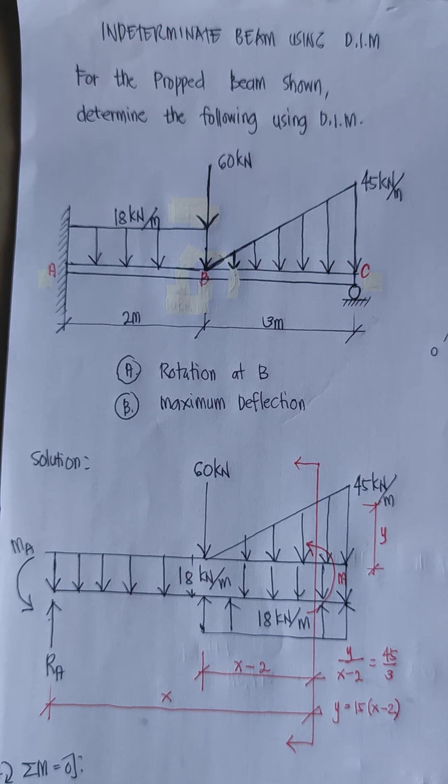Okay, so for this problem, pag-uusapan naman natin ang indeterminate beam using the double integration method. So dito, sa problem na to, meron tayong example problem. For the propped beam shown, determine the following using the double integration method.

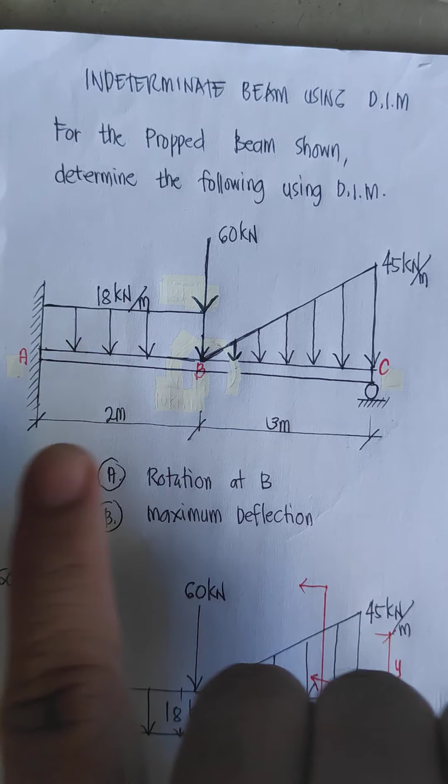So given tayo ng propped beam. So pagka sinabi nating propped beam, that is a fixed support and a roller support. So rotation at B, then the maximum deflection ang tinatanong. Okay? So to solve for that, here is the solution.

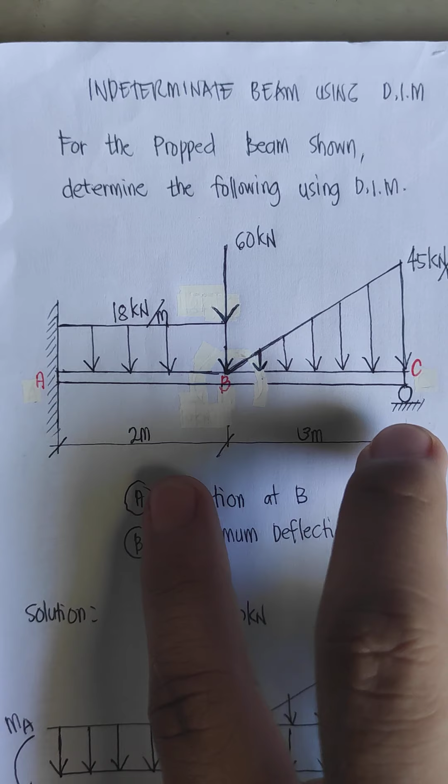So we apply the formula R is equal to 3N. Kung equal siya, so that is statically determinate. Then pag that is greater than, yun ay statically indeterminate.

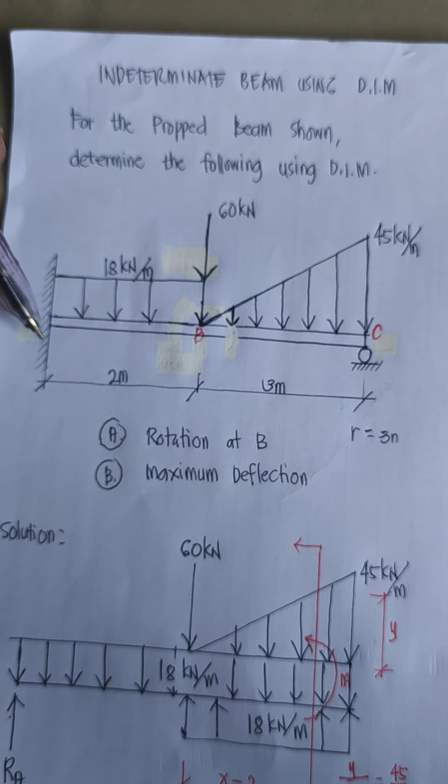So, ilan ang reaction? Tatlo to kasi meron tayong horizontal, vertical, and moment. Then, we have one reaction for the roller. So, that is 4 is greater than 3 times 1, greater than siya kasi isang member lang naman, di ba? What is 3 times 1? So, that is 3. So, that is statically indeterminate to the first degree.

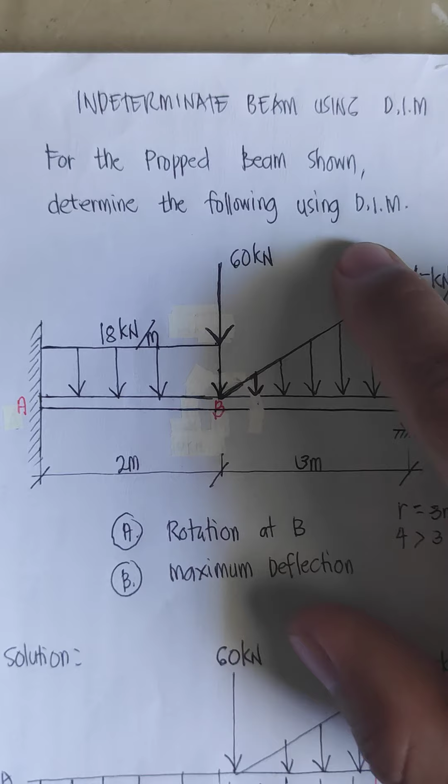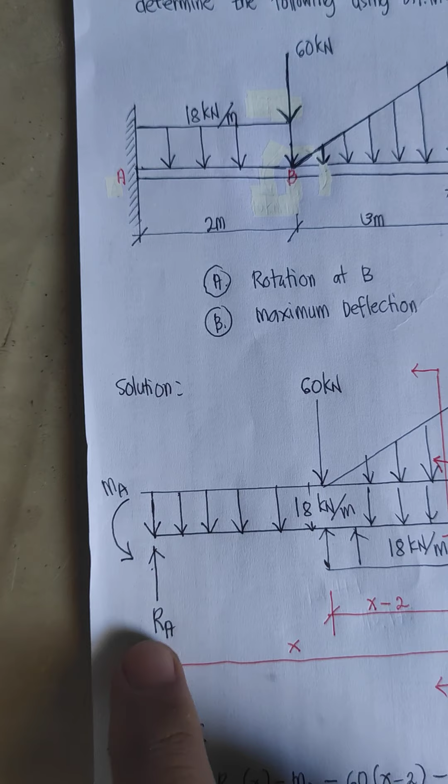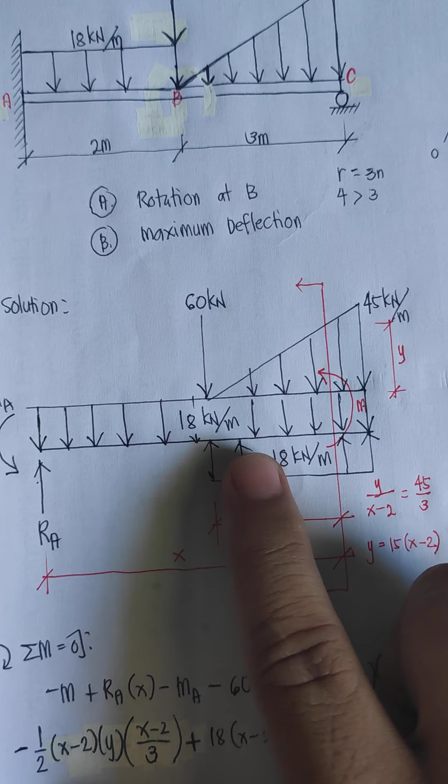So, ito yung 18 kN per meter. So, nag-assume na ako ng reaction na upward. So, that is RA and MA or the moment at point A is counterclockwise. So, itong 18 kN per meter ay i-extend natin hanggang makarating sa point C. Yun na yun. Then, syempre kung nagdagdag tayo ng 18 kN per meter na downward, so dapat magdagdag rin tayo ng 18 kN per meter na upward para ang mangyari parang wala ka lang dinagdag sa load na yun.

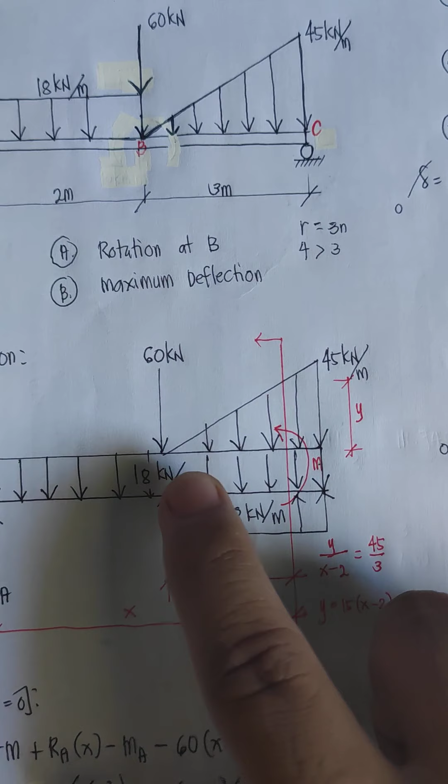Then, iakyat mo na lang ngayon yung triangular load natin or yung varying load natin na 0 to 45 kN per meter na intensity, di ba? So, that is the intensity of the varying load. Okay? So, yan na yung mangyayari dyan sa loads natin.

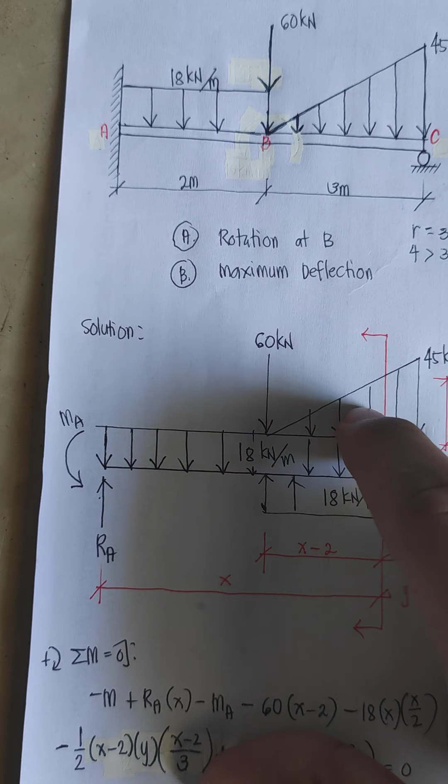Then, apply tayo ng cutting plane. So, magka-cut tayo dito sa point na to. Then, re-resist na moment is pa-left, I mean, counterclockwise. Okay? So, this distance is distance x. And this distance is x minus 2. Bakit naging x minus 2 to? Kasi this is x and this is 2 meters. So, this becomes x minus 2.

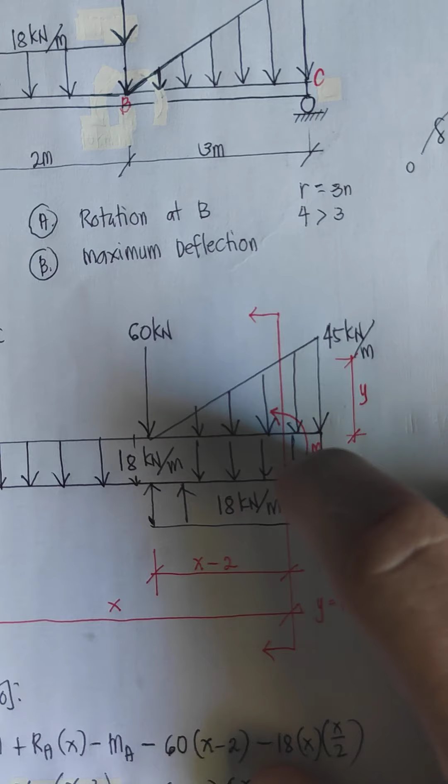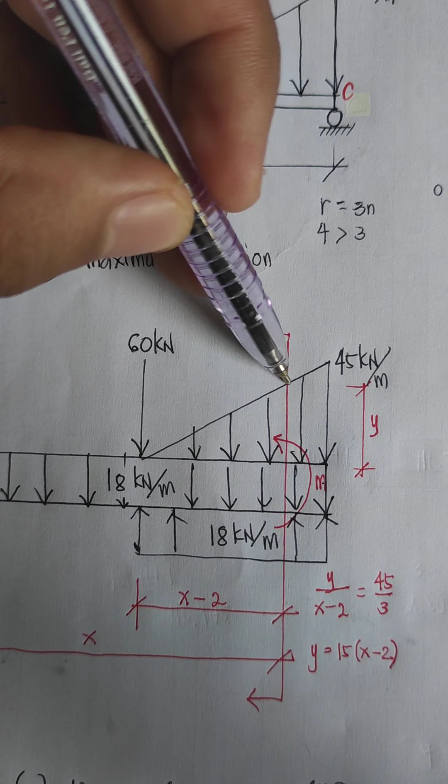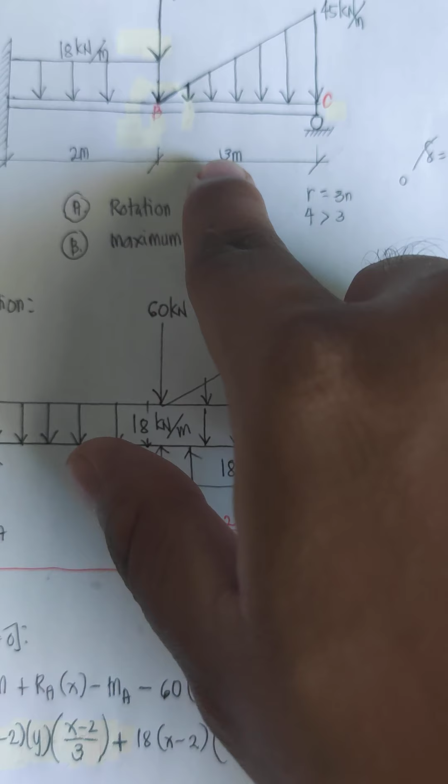So, let's say this is the intensity for the triangular load. Dito tayo nag-cut. So, mula dito sa point na to hanggang dito sa point na to, that is distance y. So, if that is y, we can apply the ratio and proportion. That is y over x minus 2 is equal to 45 over 3. So, that y is just equal to, what is 45 over 3? That is 15 times x minus 2. So, this is now the value for that intensity y na nagva-vary depende sa x natin.

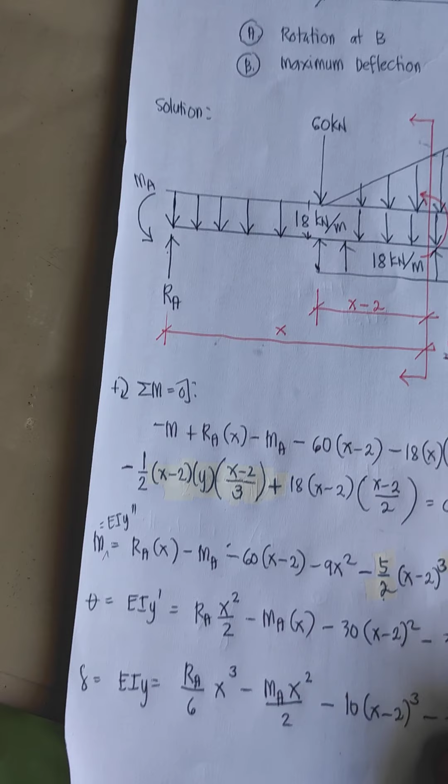Okay? So, applying the summation of moment is equal to 0. So, we have here the negative moment plus RA. Ito yung plus RA kasi clockwise. Nag-assume ako ng positive clockwise na naman. RA times x tapos minus MA. Ito yung MA natin which is counterclockwise kaya negative.

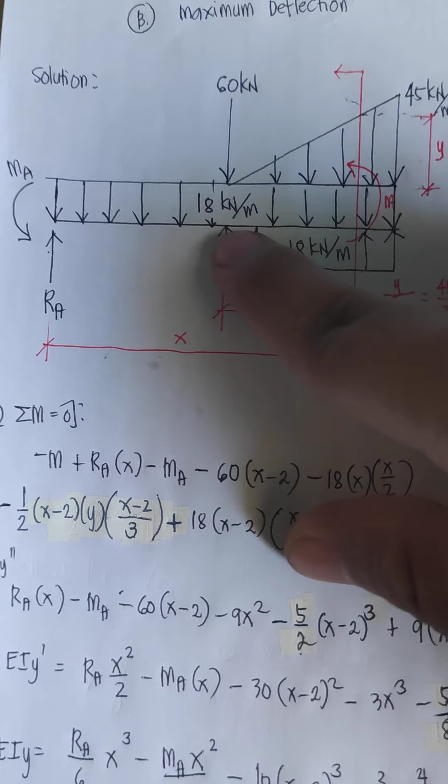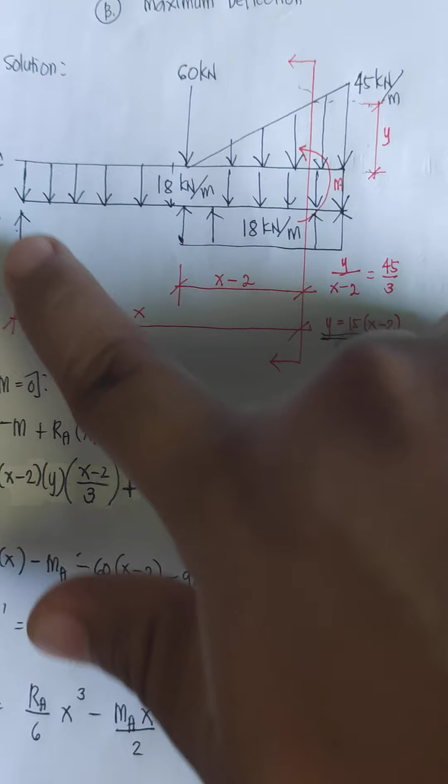Tapos itong 60, iikot na naman siya ng counterclockwise. Minus 60 times yung distance niya na x minus 2 minus 18. Ito yung 18 natin times x, distance x, diba? Then centroid na x over 2, yung location ng centroid, diba? Then minus 1 half. Itong 1 half na to, yan yung area ng triangular load natin.

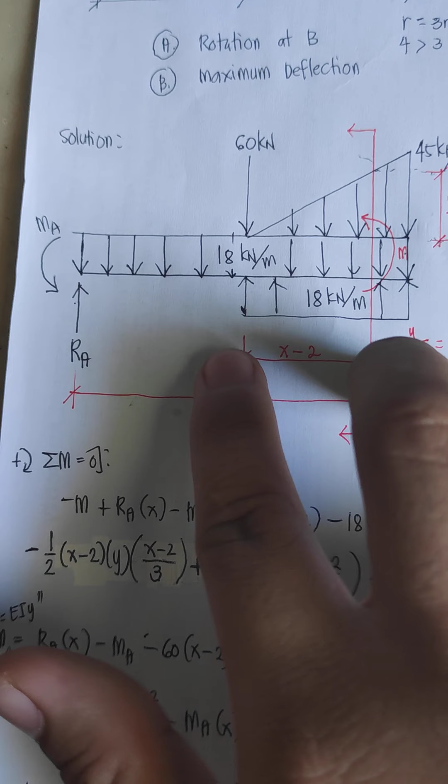So, ang area ng triangular load natin, 1 half ng base. Ang base natin ay x minus 2. Kaya x minus 2 yan. Tapos, yung height niyan ay y. So, ito yung y. Tapos, multiply lang natin siya sa centroid ng triangular load.

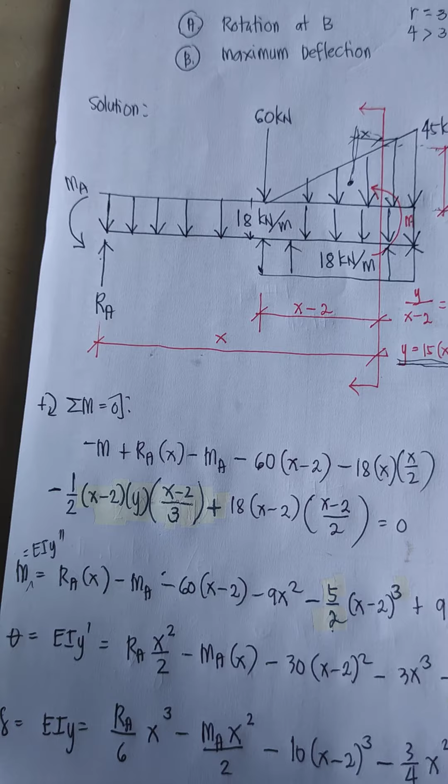So, centroid niya ay x over 3, diba? Yung base niya over 3. Oh, ito, ito yung x bar niya. So, ilan yung x bar na yan? That is x minus 2. Ito yung distance na to over 3, diba? Then, plus, we have here 18.

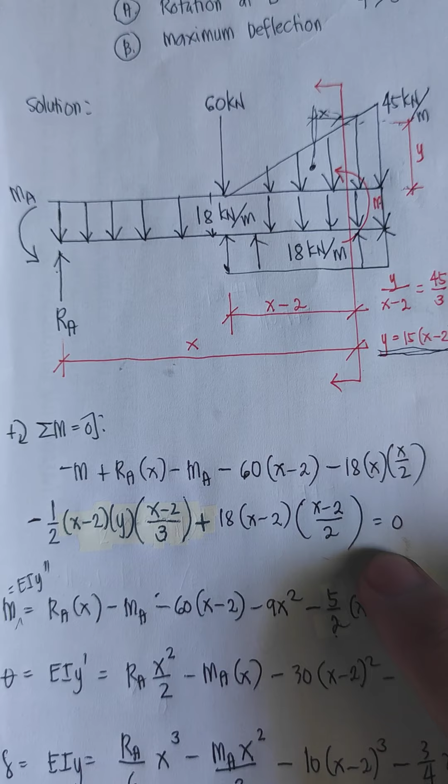Ito naman yung 18 na to na uniform load. Yan na lang yung hindi natin nakakount. So, that is 18 times x minus 2, times x minus 2 over 2, is equal to 0. Okay, so ganyan na. Ang kino-consider lang natin na load ay ito, hanggang dyan lang, kasi dun sa cutting plane. Okay? So, yan na yun. Then, is equal to 0.

Then, manipulate na uli natin yung equation. So, transpose natin yung m doon. So, that becomes, yung negative na yun magiging positive na. Is equal to EIy double prime by the definition of the double integration method. Then, simplify nyo na lang. Okay? 18 over 2 becomes 9.

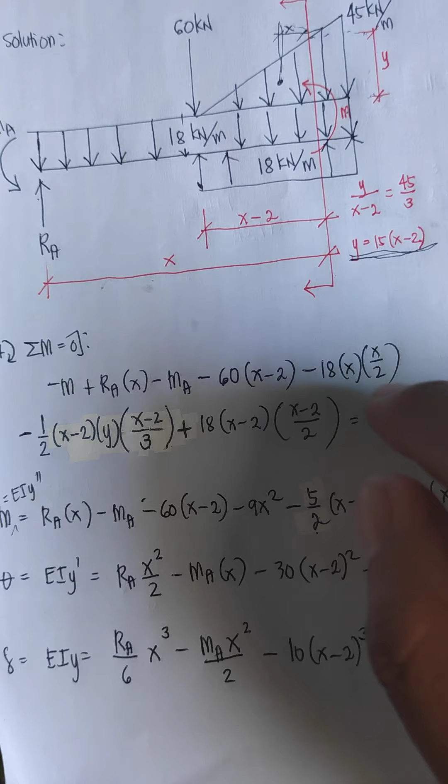Minus, paano to? Yung negative 1 half times x minus 2. Saan ba equal yung y na yan? That y is equal to 15 times x minus 2. So, kung papalitan nyo to, papalitan nyo natin yan ng 15 times x minus 2. So, ano mangyayari dyan? So, that is 15 over 2 over 3. So, pwede nating simplify yung 15 at 3, diba? Magiging ano yan? 5, diba? 15 divided by 3 is 5.

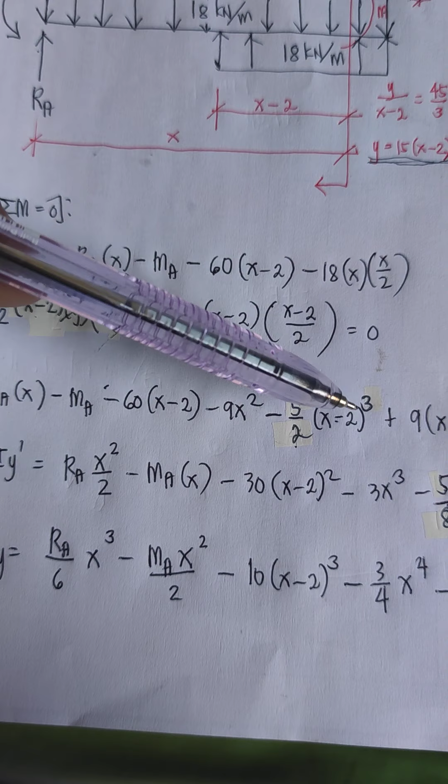Over 2, kaya naging minus 5 over 2 na lang yon. Tapos, times x minus 2 times x minus 2 times x minus 2. So, ang magiging sagot dyan, ang magiging multiplier nila ay x minus 2 raised to the third power. Okay, plus, ito naman, we have 18 over 2 magiging 9 times x minus 2 squared. Okay? So, yan na. Yan na yung magiging simplified equation yan.

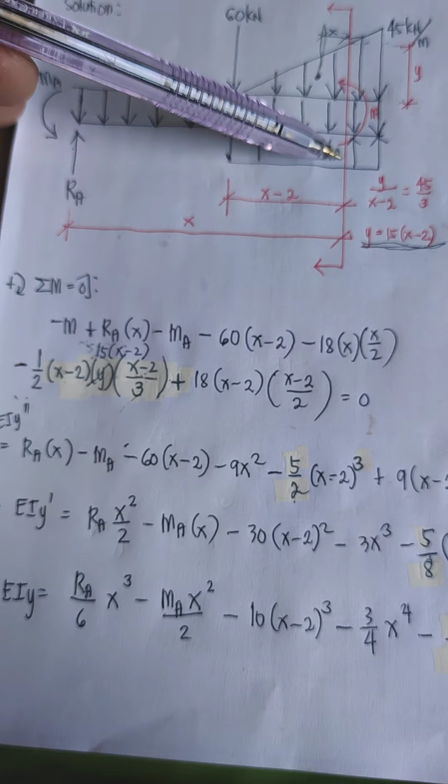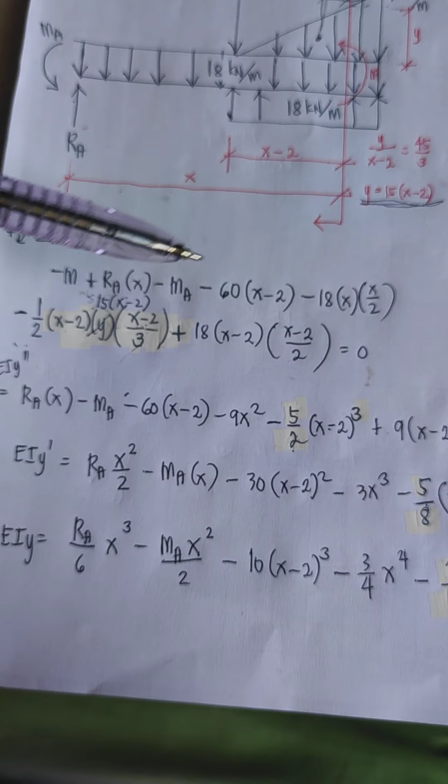So, idagdag ko lang pala para malaman nyo kung wala kayong nakaligtaan. Bilangin nyo lahat ng load. So, 1, 2, 3, 4, 5, 6, 7. So, 7 ba yan lahat? 1, 2, 3, 4, 5, 6, 7. So, 7 rin. Kaya, ibig sabihin lahat ng loads natin ay naisama natin sa pag-create ng moment equation. So, common mistake kasi yan na merong hindi nasasama na equation. So, yan na yun. Then, integrate natin for the first time.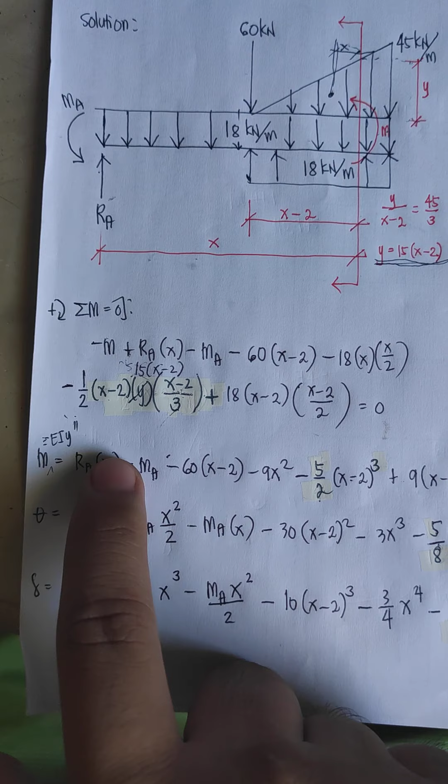Yun na yung magiging rotation equation. So, that becomes RAX, integral niyan. So, x squared over 2 minus MA times x. Since constant yan, so, ang integral niyan ay magkakaroon lang yan ng multiplier na x. Then, integral nito, x minus 2 raised to 1 yan. So, raised to 2 over 2. What is 60 over 2? Pwede na natin isimplify yun as 30 na lang.

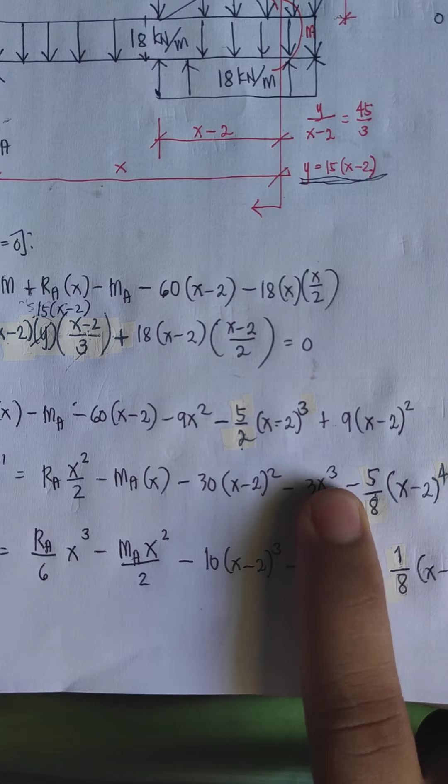Diba? Yung constant. Minus, what is the integral of 9x squared? So, that is 9x raised to 3 over 3. So, what is 9 over 3? That is 3x cubed, diba? So, madali lang naman i-check yan. Pag dinerivative mo yan, magiging yun lang rin yan, diba? Derivative nito ay 9x squared, diba?

Minus. So, integral nitong 5 halves ng x minus 2 raised to 3 is, ito magiging raised to 4 over 4. And then, what is 2 times 4? That is 8, diba? So, integral nyo rin to, raised to 3 over 3. What is 9 over 3? That is 3 times x minus 2 raised to 3 plus C1. So, that is now the rotation equation.

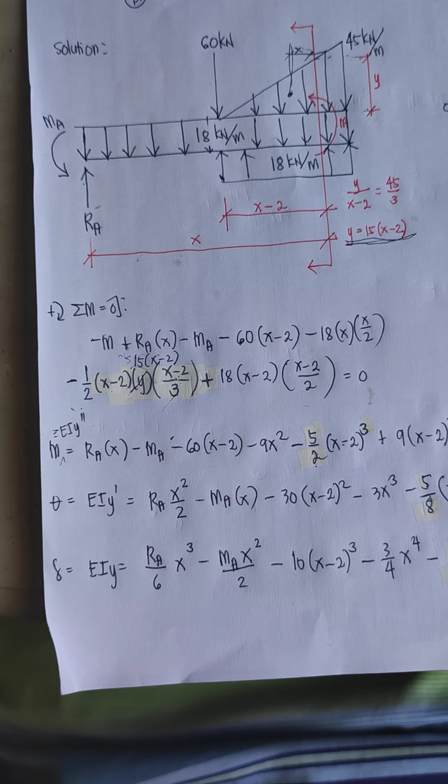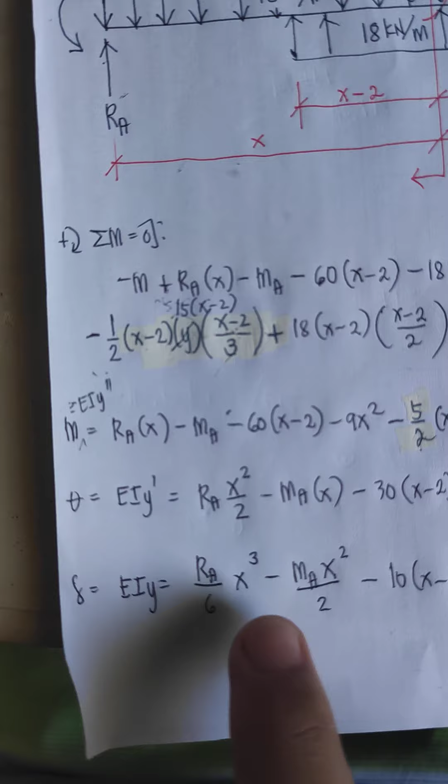Okay? So, for the deflection equation, so, integrate nyo for the second time. So, RA over 2, constant lang yan. X squared, integral nyan ay x raised to 3 over 3. Then, what is 3 times 2? So, that is 6. So, integral uli nito, MAX squared over 2.

Minus 30, tapos raised to 2, raised to 2 plus 1 over 2 plus 1, so raised to 3 over 3. Then what is 30 over 3? So magiging 10. Integrate nyo ulit ito, raised to 3 over 4, raised to 3. So magiging raised to 4 over 4. Ito na yan. Raised to 5 over 5. So, paano naging 1/8 yun? Kasi, simplify nyo lang, diba? So, meron ka dyang, meron tayo dyang 5/8.

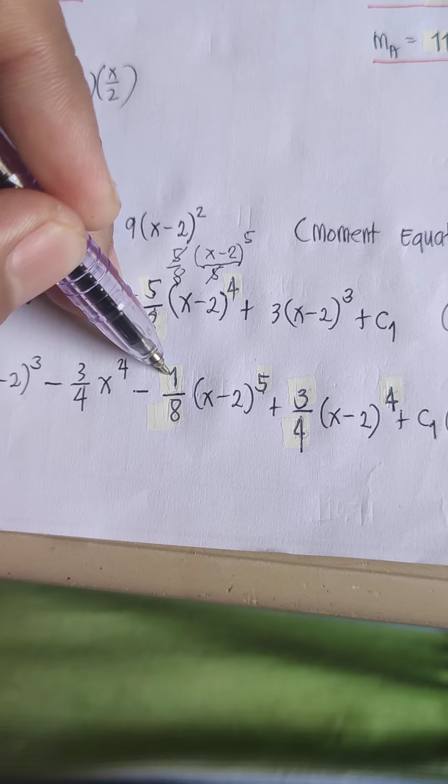Meron tayong x minus 2 raised to 4 plus 1, magiging 5 over 5, magka-cancel lang yung 5 dyan. Pwede nyo i-calculate para mas simplified, that is equivalent to 1 over 8 na lang, times x minus 2 raised to 5. Integral nito, raised to 4 over 4, tapos plus integral ng constant ay constant x plus the second arbitrary constant. So that is now the deflection equation.

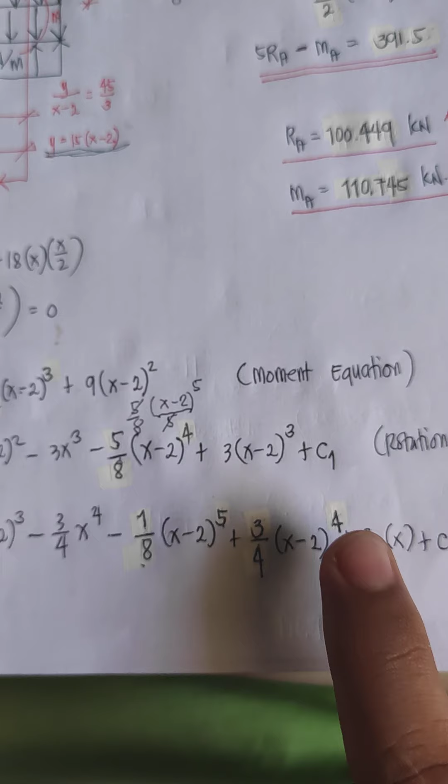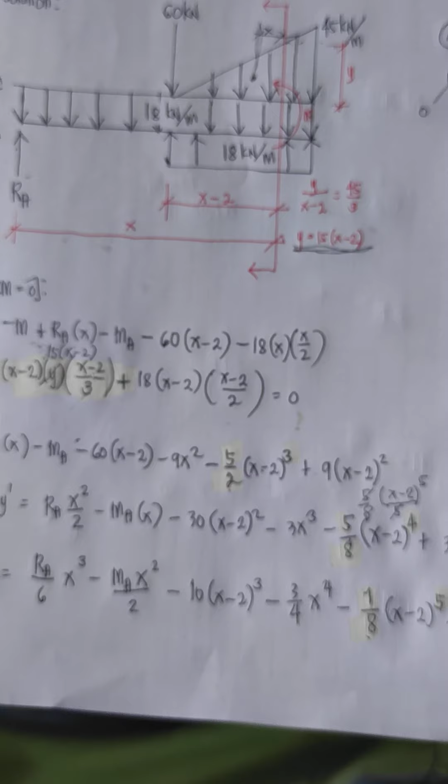Sa problem na to, ilan ang unknown natin? Hindi katulad pagka determinate beam, dalawa lang ang unknown natin, C1 and C2 lang. Pero dito sa problem na to, ang unknown natin ay 4 - meron na tayong dalawa dyan, tapos pangatlo, pang-4, yung RA at saka MA. So to solve for that, kailangan natin ang mga boundary conditions. Kailangan makakreate muna tayo ng 4 na boundary condition para meron tayong 4 unknowns, then 4 equations para ma-solve yung C1, C2, RA at saka MA niya.

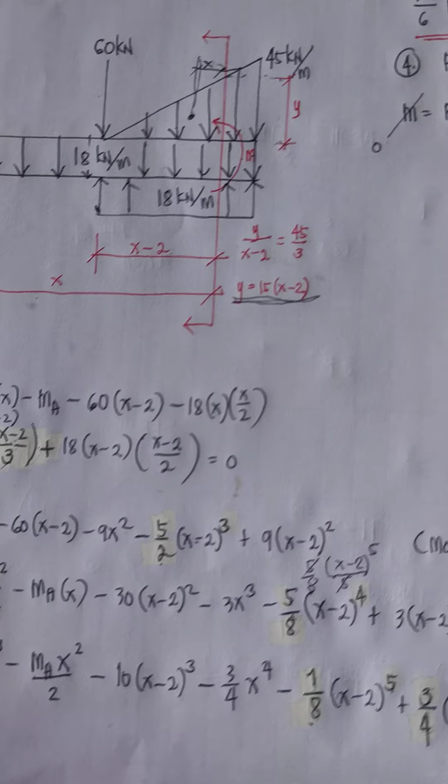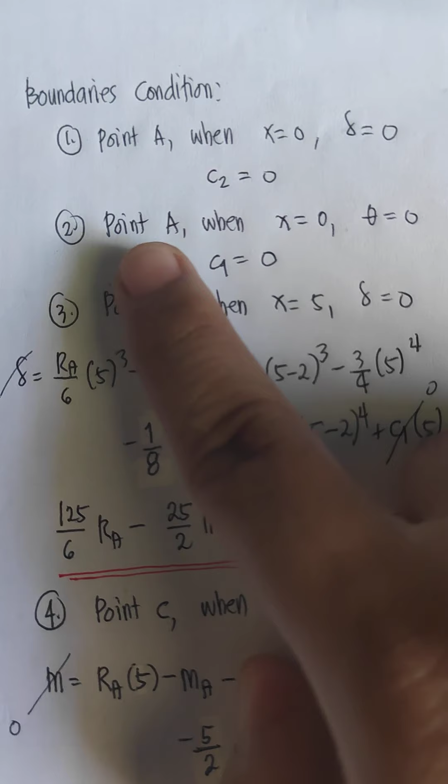Dito sa boundary condition, solve muna natin. We can say that at point A, when x is 0, deflection and rotation is equal to 0. Napansin nyo, pagka-cantilever, laging nagsisiro ang C1 at C2 - basta nandito sa left end, tapos nag-cut ka sa right, laging ang nangyayari dyan, C1 at saka C2 niya ay 0. Substitute nyo lang dito, yung x na 0, syempre puro 0 yan, kahit itong 0 minus 2, ang lalabas lang rin dyan ay 0. So when x is 0, deflection 0, C2 is equal to 0. Then point A, when x is 0, rotation is 0. Substitute ka dun sa rotation, 0 lang rin to. So yung C1 natin ay equal lang rin sa 0.

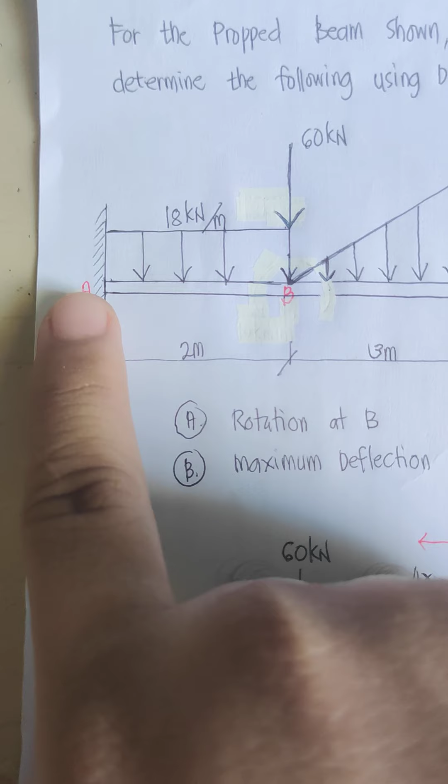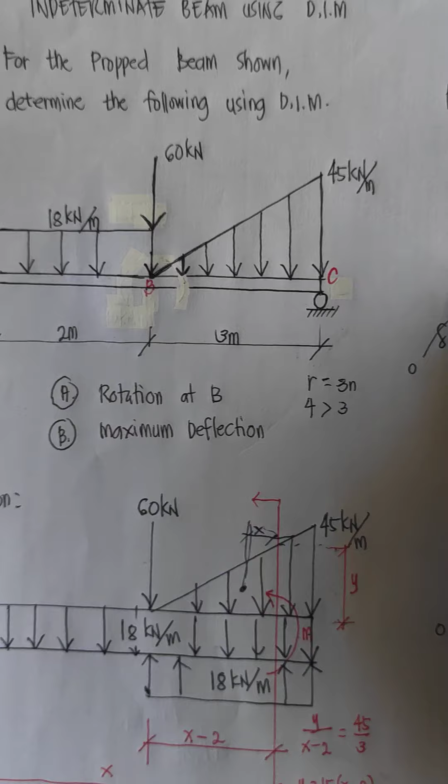Dito, point C - dahil okay na tayo sa boundary condition sa A, ano pa yung pwede natin kunin? Pwede tayong magsabi na ang deflection sa point C, dahil may support yan, ay 0 rin. So at point C, when x is equal to - ano ba yung distance? Since nag-cut tayo dyan, ito yung Cartesian natin, meron tayo ditong y-axis, and this is the x-axis. Ano yung distance na yan? What is 2 plus 3? That is 5. So point C, when x is equal to 5, the deflection is equal to 0.

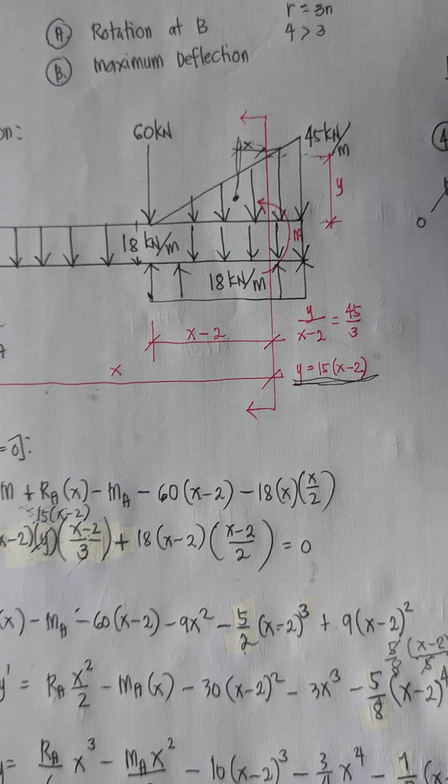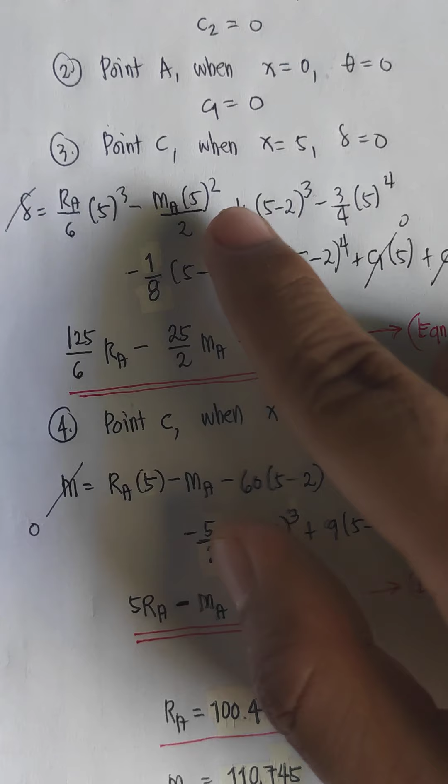Balik ka lang rin dun sa deflection equation - ito yung deflection equation natin, RA over 6 times x cube. Substitute nyo lang dyan yung 5. Dito, 0 na to, kasi 0 ang C1, C2 natin. So what is 5 times 5 times 5? That is 125 over 6. Kaya 125 over 6 to, RA. Minus, what is 5 squared over 2? That is 25 over 2 ng MA. Then lahat ng constant na to ay ilipat nyo dun sa right side, dito sa may 0. So magpa-positive na tong 10 times 3 cube, then ito magpa-positive rin yan. Lipat nyo, ang lalabas dyan ay 708.375. So this is now the equation 1.

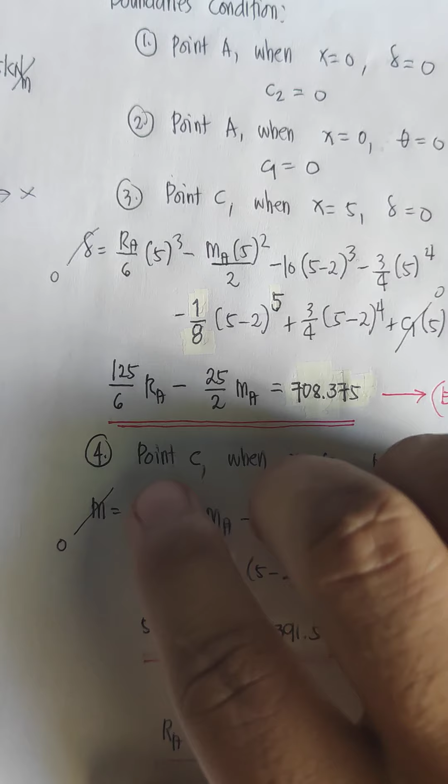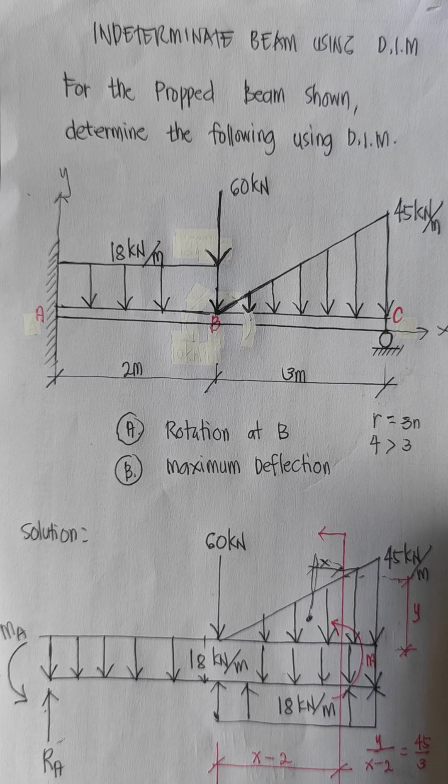Dalawang unknown tayo, so kailangan pa natin ng isang equation. Dito, ano kaya yung isang boundary condition na dapat natin gamitin? Observe natin yung beam natin - ano pa ba yung isang boundary condition na pwede nating i-apply dyan? Tatandaan nyo, pagka meron tayong hinge or roller, tapos nasa pinaka dulo sila, ano yung napapansin nyo sa moment nila? Ang moment doon ay laging equal sa 0, di ba?

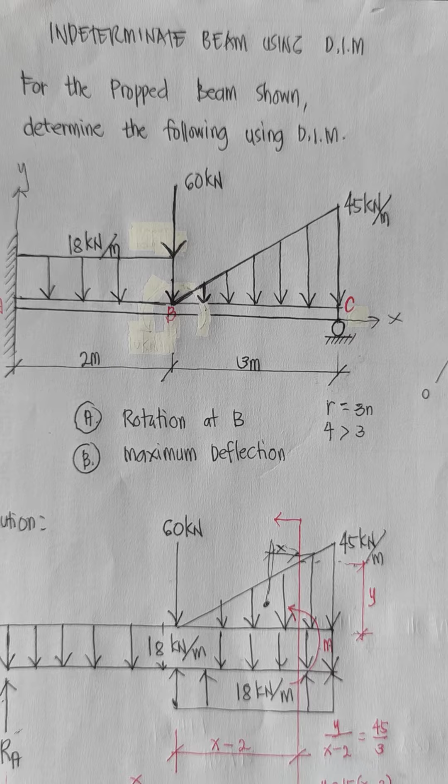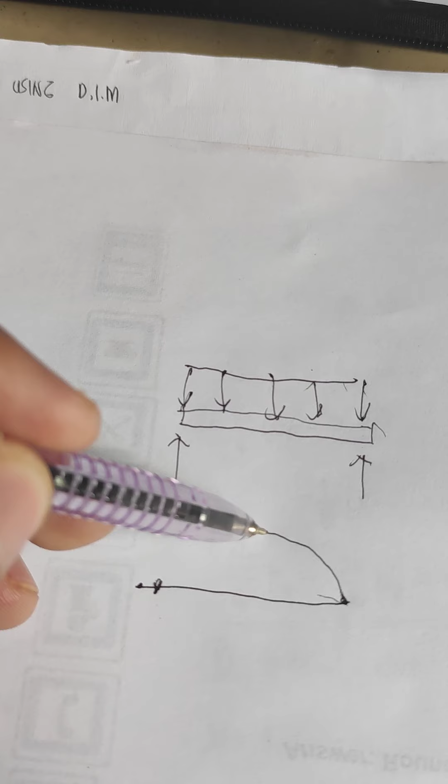So for example, meron tayo ditong beam, tapos meron tayong uniform load. Pa-simplify natin yung load, tapos meron tayong reaction dito. Ang moment equation niya nagiging ano? Ang nangyayari, 0 yung moment equation dito. I-try nyo i-drawing yung shear and moment diagram yan, then magsisiro lang rin yan sa left and right support.

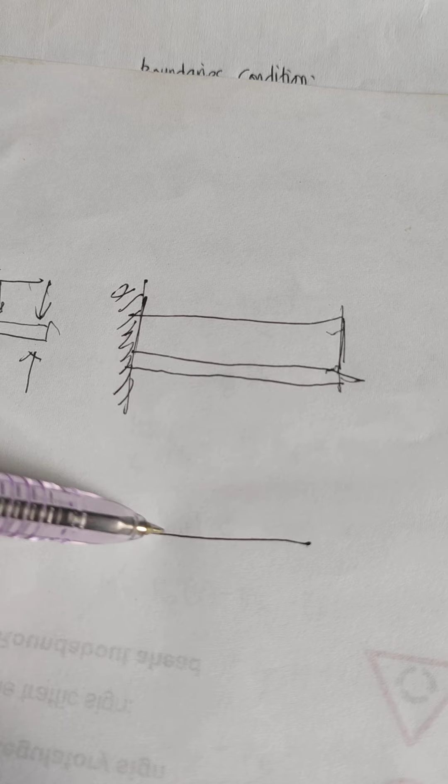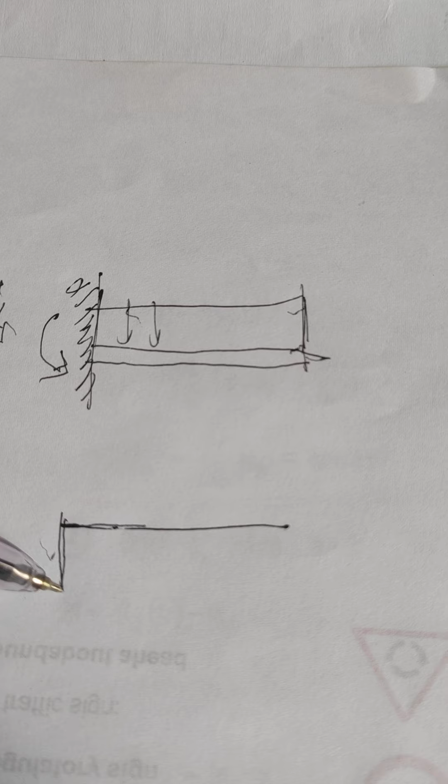Paano naman kapag propped beam? Pagka propped beam naman, okay, subjected rin siya sa uniform load. Yung shear and yung moment diagram na lang pag-usapan natin. Ang moment diagram niyan ay, since usually dahil magro-rotate clockwise yan, ang mangyayari dito is counterclockwise. Then pag counterclockwise, nagne-negative yan, then ang nagiging moment equation yan ay ganito.

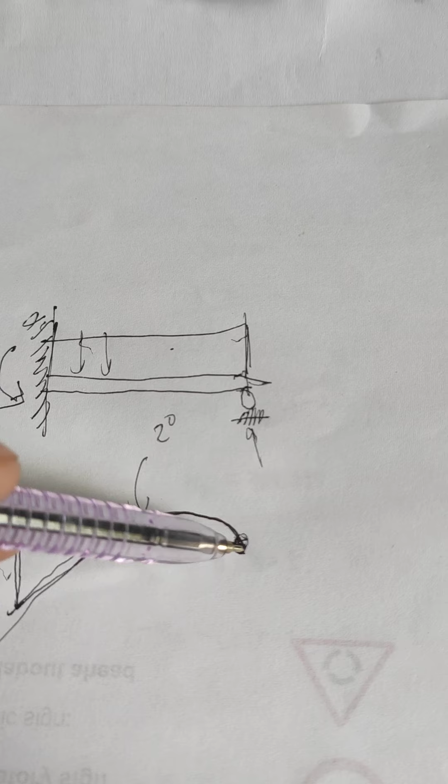Okay, so 0 degree, ito ay magiging second degree ang nangyayari. Ano napansin nyo? Yung moment at this point—sorry, this is a roller kasi propped beam siya. So dahil meron siyang reaction dyan, ang mangyayari pagka propped beam yan, laging 0 yung moment doon sa point dito. Isa yan sa pwede natin gamiting boundary condition.

We can say that at point C, when x is equal to 5—yan yung distance ng point C—the moment is equal to 0. So from that, we can say that moment is equal to RA.

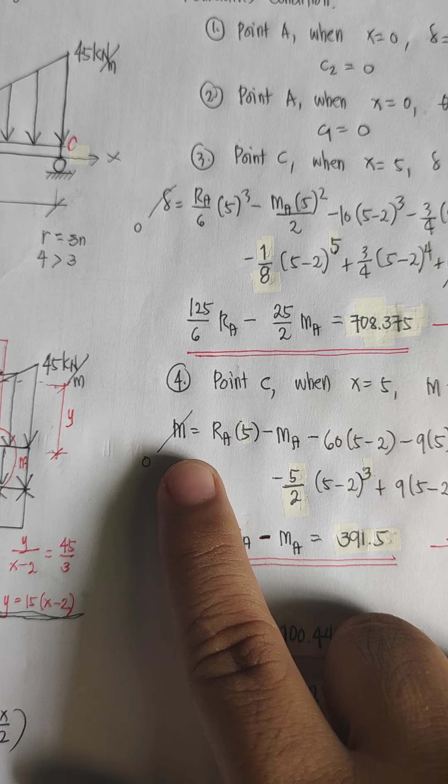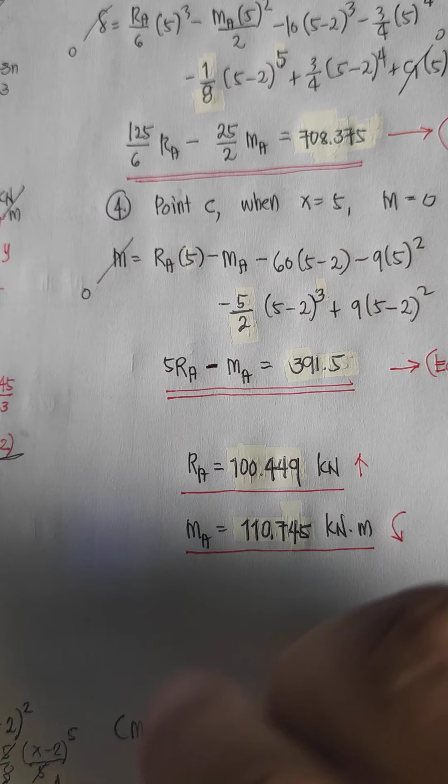Balik lang tayo dun sa equation natin ng moment: RAX minus MA minus 60. Substitute niya lang dito yung value ng x which is equal to 5. Dito, pagka kinuha na natin yung equation, simplify natin. What is RA times 5? That is 5RA minus MA.

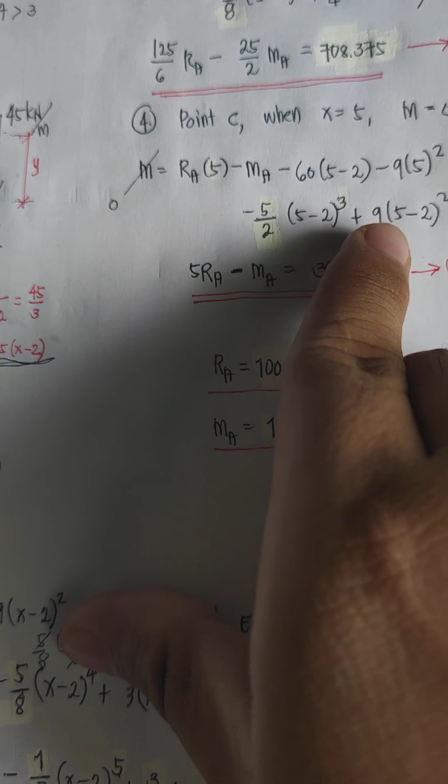Lahat ng constant na ito, ilipat nyo na doon sa may value na 0 yung naging value dito. Magpa-positive na yan pag nilipat nyo doon—positive, positive, then negative. Paki-compute na lang sa calculator, that is 391.5. Okay, then you solve this using your calculator.

Doon na lang tayo sa mode 5.1. Punta na lang kayo dun sa mode 5.1, then you input na lang the value, the coefficient. That is 125 over 6. Input nyo dito ay 125 over 6, tapos negative 25 over 2.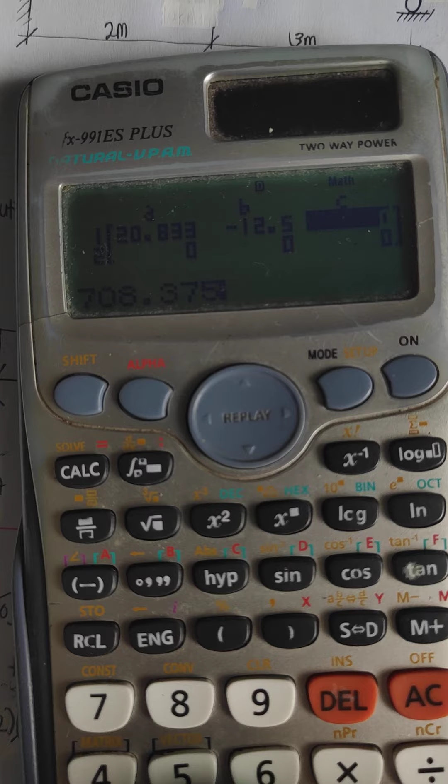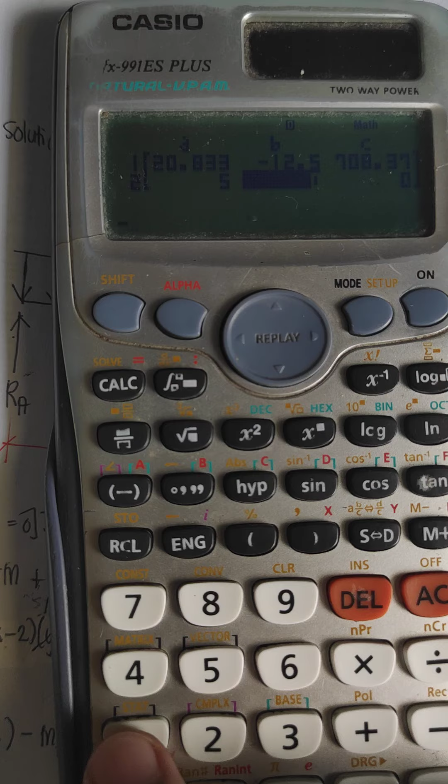So negative 25 over 2, tapos 708.375—okay, yun kasi yung value doon, 708.375. Yung coefficient lang kaya 125 over 6, negative 25 over 2, 708.375. So coefficient nito, 5, negative 1, 391.5. You input 5, then negative 1, tapos 391.5.

Okay, yung unang lalabas na value, that is the value of RA. So kung ano yung equation na yun, that is 100.449 and 110.745. Okay, so that is now the value.

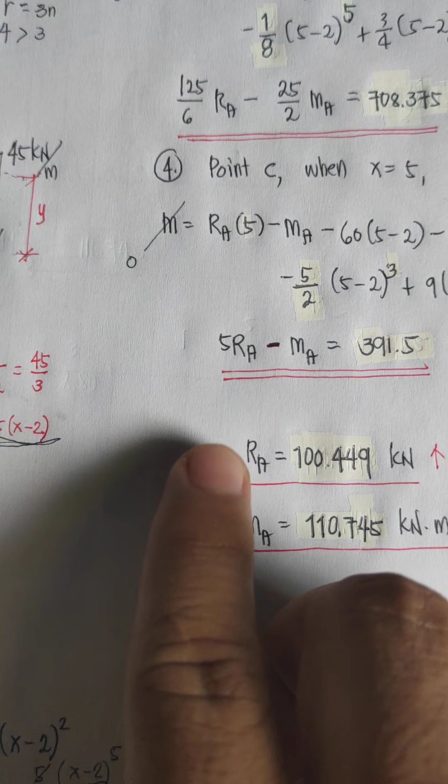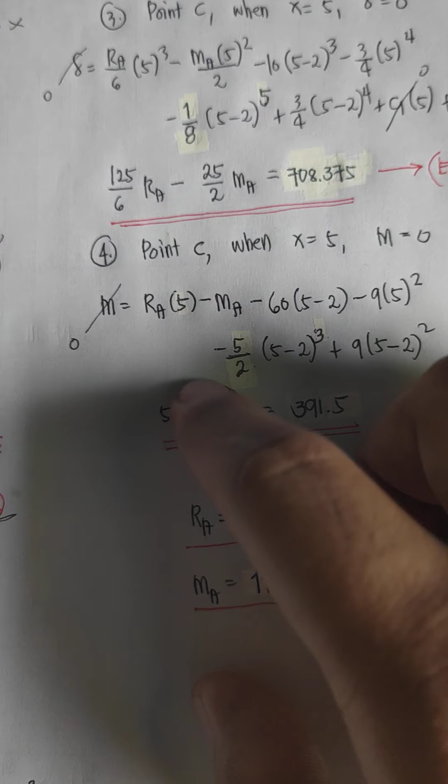Pagka gumawa kayo ng equation, dapat kung nauna yung RA dito, dapat mauna rin yung RA dito. Kung nauna yung MA dyan, pangalawa yung MA dyan, so dapat pangalawa lang rin yung MA dyan. Hindi pwede RA, MA yan, tapos naging equation nito, negative MA plus 5RA, tapos i-input mo negative 1 tapos 5—so mali yan. So dapat i-arrange nyo: unknown na RA, unknown na MA, then constant na value. Ganyan yung gawin yung format.

Dito, na-solve na natin yung reaction at A at saka moment sa point A. Yan na yun. Meron na tayong RA, meron na tayong MA na pwedeng i-substitute dito. Tapos meron na tayong C1 and C2. So we can now solve for the unknowns, the rotation and the maximum deflection.

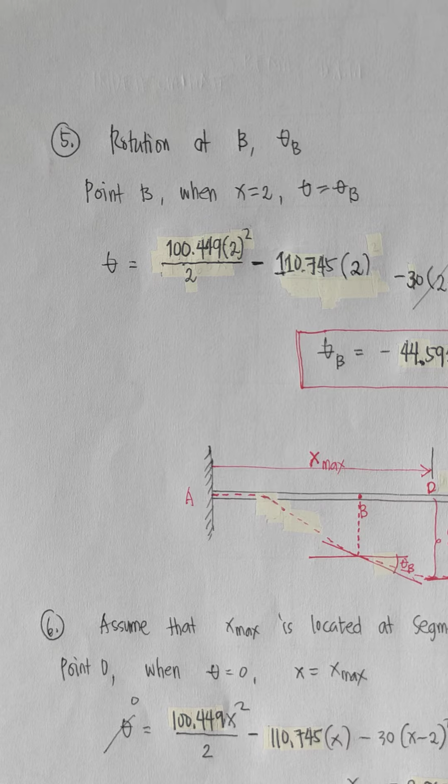Okay, so to solve for the rotation at B, yun yung unang tinatanong, di ba? Ang gagawin natin, rotation at B, or that is theta B. Sa point B, we can say that when x is equal to 2, the rotation is equal to theta B. Bakit 2? Kasi mula dito, papunta doon, that is distance 2 meters. So this is theta.

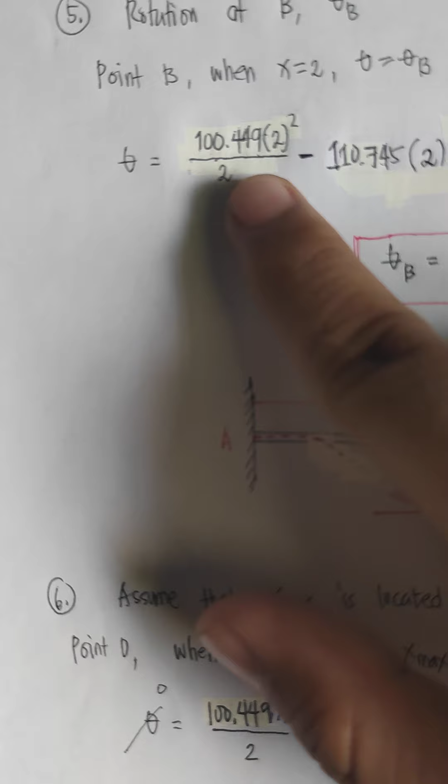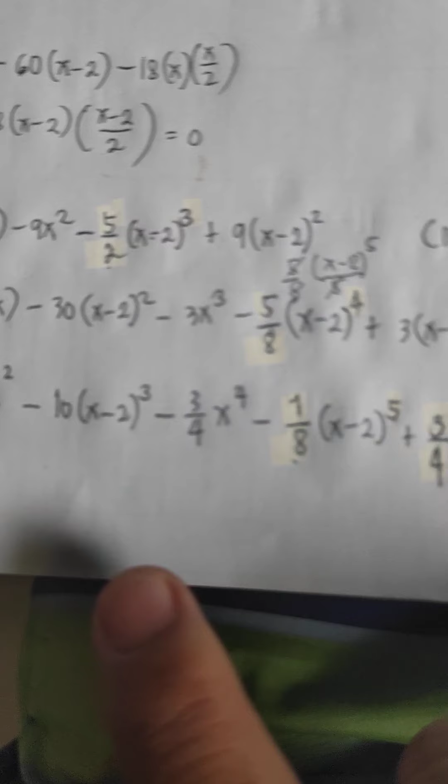What is the formula for theta? RAx squared over 2. Ano ba yung value ng RA natin? 100.449, so that is 100.449 times 2 squared over 2, minus yung moment natin, 110.745, times 2. Kasi based dito sa formula ng deflection—rotation, I mean—ito pala, MA times X. So that is MA na negative 110.745 times 2.

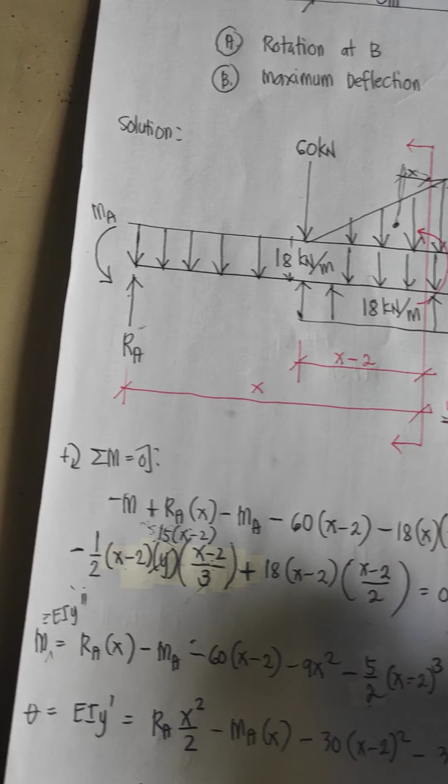By the way, ano ibig sabihin ng positive dito? Bakit positive ang lumabas dyan? Ibig sabihin yung inassume natin na counterclockwise ay tama, kaya counterclockwise din yan. Okay, so ganoon naman tayo sa pag-compute ng reaction, di ba? Pagka nag-positive yung value, ibig sabihin yung assumption natin ay tama.

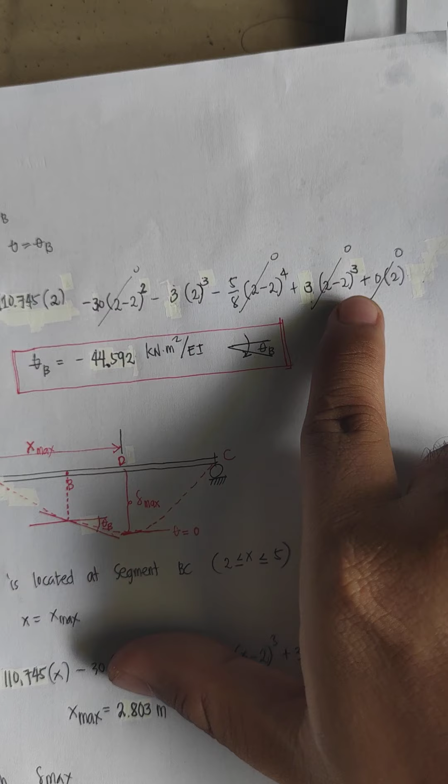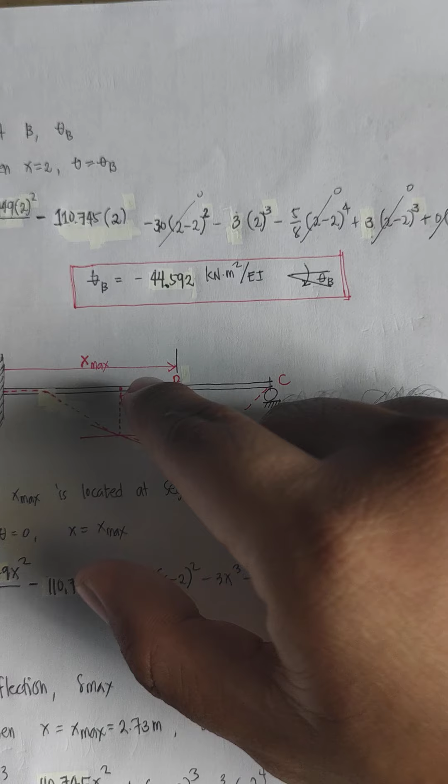So substitute nyo na lang yung x is equal to 2 dyan, mula dun sa rotation equation natin. Magsi-0 na to, 0 na, 0 yung C1. Okay, so yan, 0, 0. Ang matitira ay ito na lang. So you solve for the rotation at B. Ang lalabas na value sa rotation at B is equal to negative 44.592.